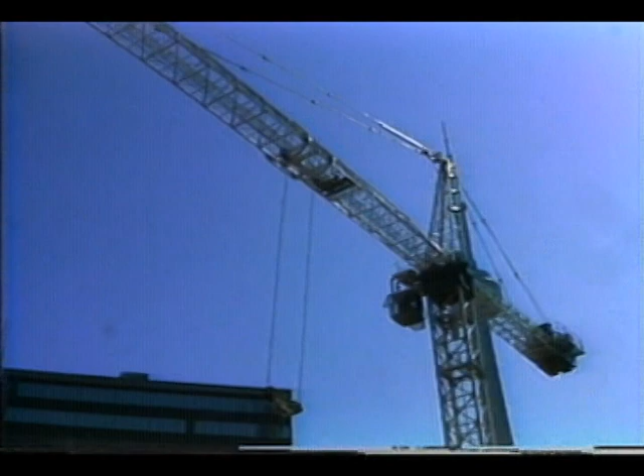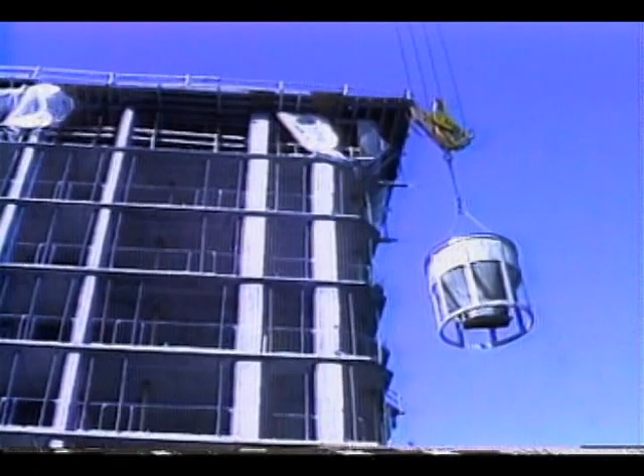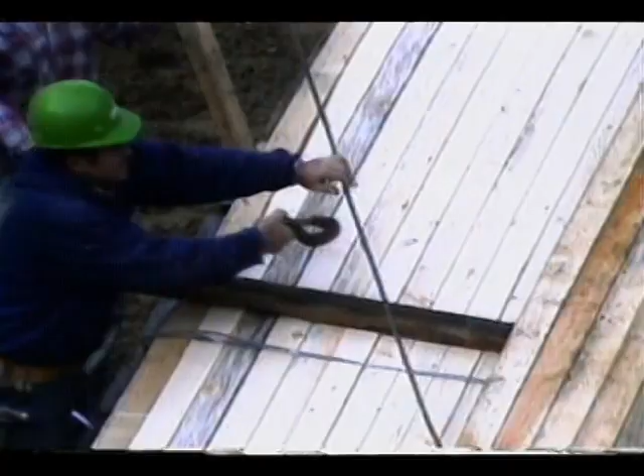There are many factors to be considered in the choice and use of wire rope for rigging and hoisting. One of the most important is safety. Although you must select equipment that will get the job done economically, you must also eliminate any hazard to people and property. Use only wire ropes of the size, grade, and construction specified by the manufacturers of hoisting equipment or wire rope. They base their recommendations on actual working conditions.

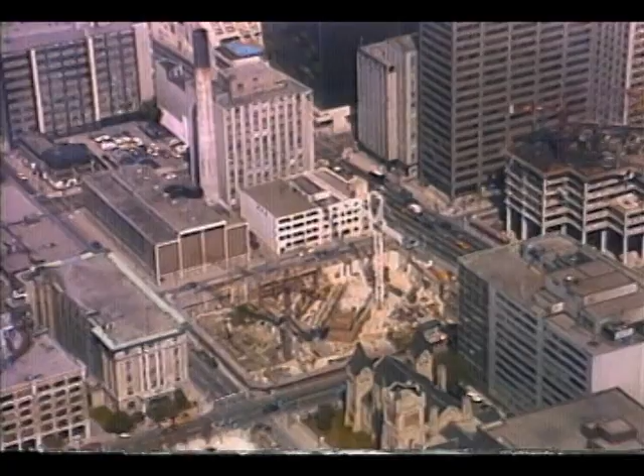In this session, you will learn how to identify, select, and safely use the wire ropes required for rigging and hoisting in construction. The topics we will cover are wire rope construction and characteristics, safe working load, inspection, replacement criteria, and use, handling, and maintenance.

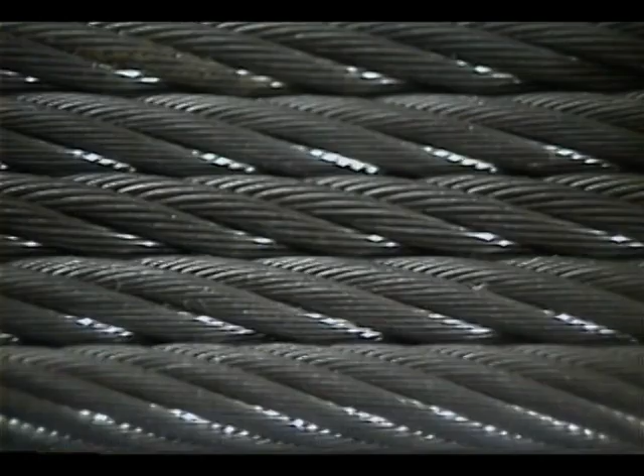Wire rope is usually made up of a number of wires laid into a strand and a number of strands laid around a core. The core may be an independent wire rope or a fiber rope. The term rope lay signifies the direction of rotation of the wires and the strands in the rope. Rotation is either to the right, clockwise, or to the left, counterclockwise. The lay of the rope affects its flexibility and resistance to wear.

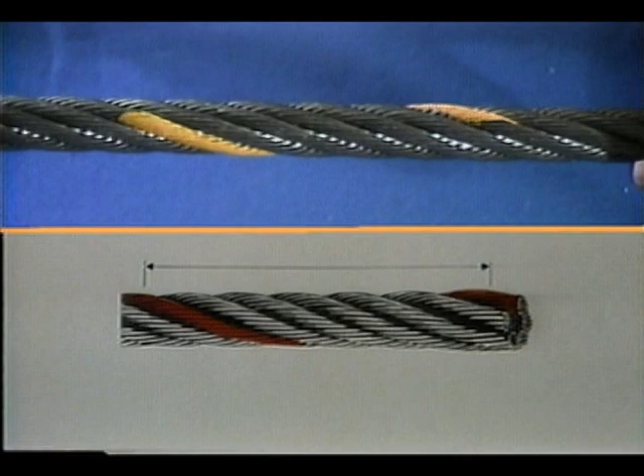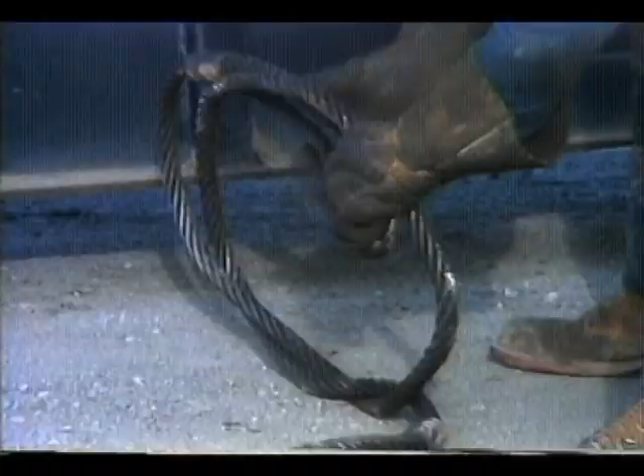The term lay length means the distance in which a strand makes one complete revolution around the rope axis. Lay length is 6 to 7 rope diameters for most wire ropes. In regular lay ropes, the wires in the strands are laid in one direction, while the strands in the rope are laid in the opposite direction. These ropes have good resistance to kinking and twisting. They can also withstand considerable crushing and distortion because only short lengths of wire are exposed on the outer surface.

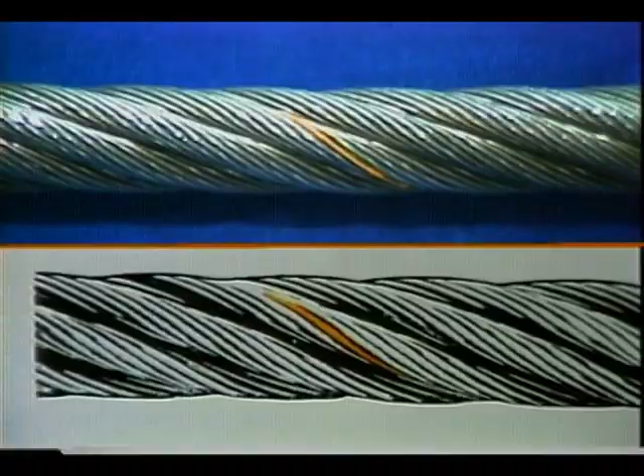In Lang lay ropes, the wires in the strands and the strands in the rope are laid in the same direction. The outer wires have a greater exposed area than regular lay rope and are therefore more resistant to abrasion. They are also more flexible and have greater resistance to fatigue. However, Lang lay ropes are more susceptible to distortion, crushing, kinking, and untwisting than are regular lay ropes. For this reason, both ends should be fixed so that rotation is prevented. They should not be used on single-part hoist lines or with swivel end connectors.

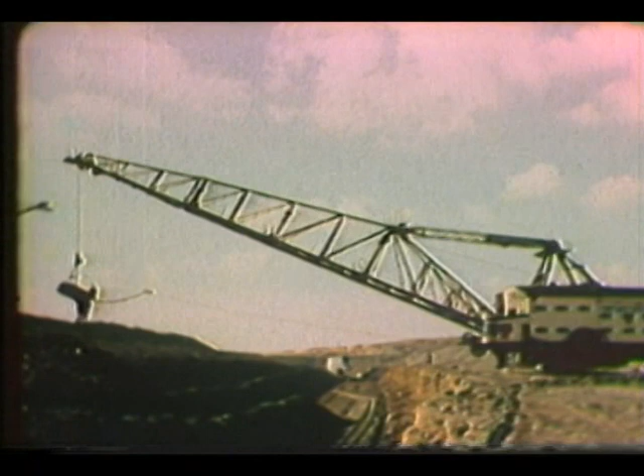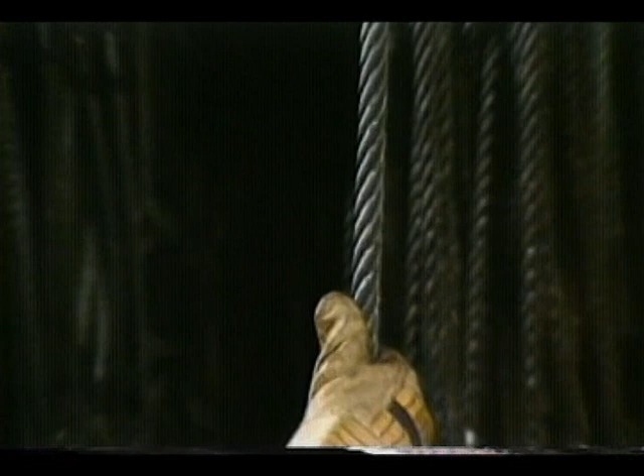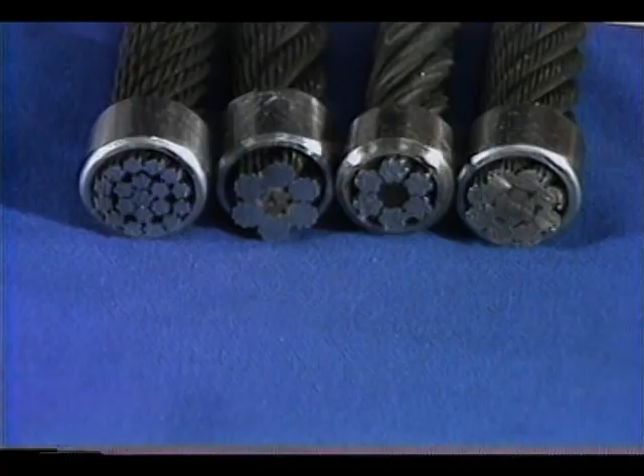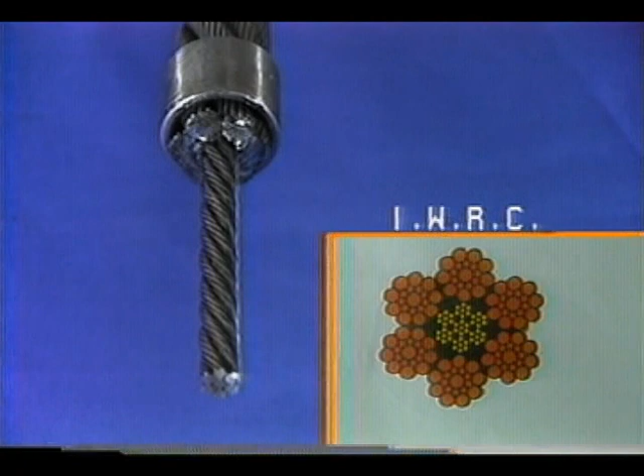Most wire ropes used in construction are right regular lay. This means that the strands twist to the right, while the wires twist to the left. The core forms the heart of the rope and is the component around which the main rope strands are laid. The core supports the strands and is intended to keep them from jamming against each other under normal loads and flexings. Wire rope is generally independent wire rope core, IWRC, or fiber core, FC. The fiber may be synthetic or natural.

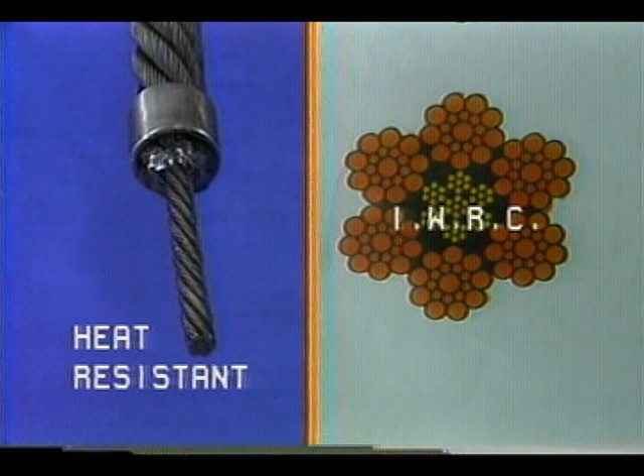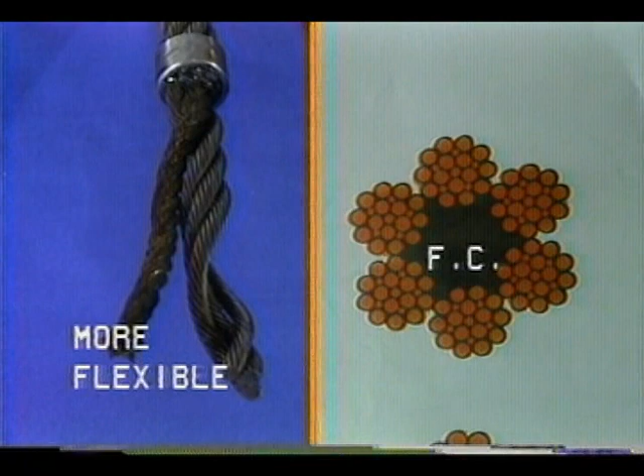Rope with independent wire rope core is more crush resistant than fiber core rope. It is also, to a certain degree, heat resistant and is slightly stronger than fiber core rope of the same diameter and construction. Wire rope core would be used, for example, where there are multiple layers of wire rope on a take-up drum or winch. Fiber core rope is more flexible than wire core rope of the same diameter and is also less costly. The type and size of wire used, the number of wires in the strands, the type of core along with its diameter determine the strength of a wire rope.

A typical wire rope designation would be half-inch diameter, 6 by 19 Seale, preformed, improved plow steel, IWRC, right regular lay. The half-inch diameter is a nominal diameter. Most new wire ropes are oversized by up to 5%. Measure wire ropes from crown to crown on opposite strands to get the correct diameter.

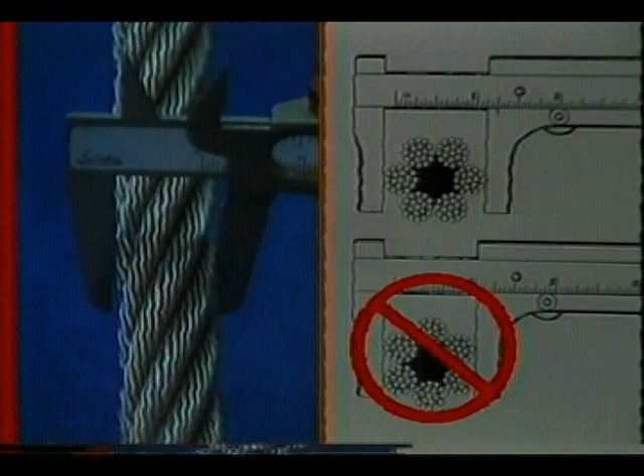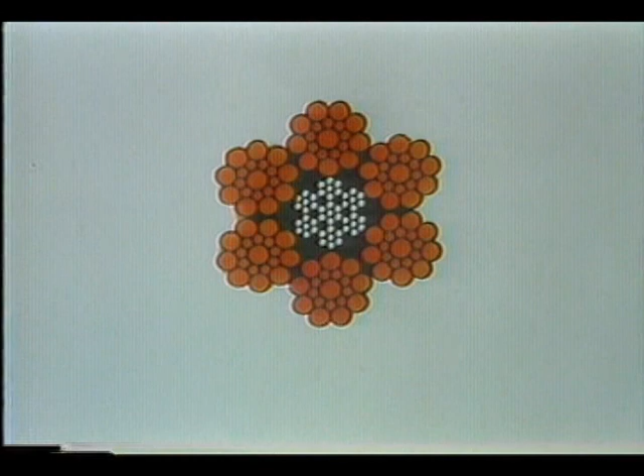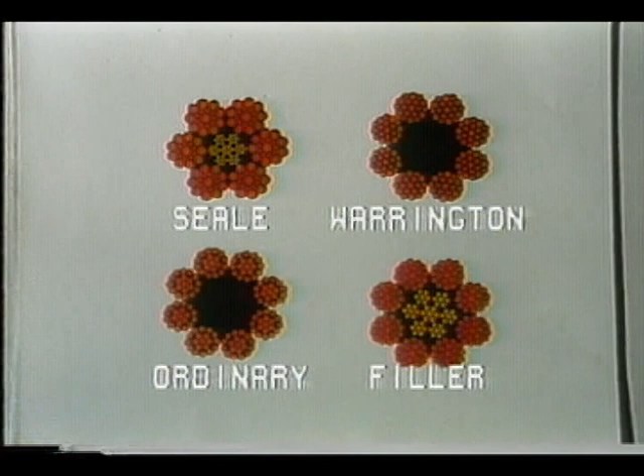6 by 19 Seale. The first number is the number of strands in the rope, in this case 6. The second number is the number of wires in each strand, 19 in this case. The word Seale indicates the pattern of wires in the strands. Other common configurations are Warrington, ordinary, and filler.

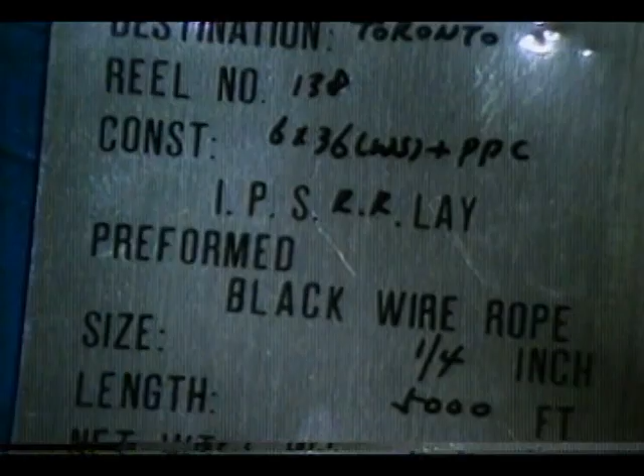Preformed refers to a process that forms the strands and wires into the spiral shape they will assume in the rope. Preforming prevents the wires and strands from straightening and brooming out after the rope has been cut. Improved plow steel, or IPS, is now the most common grade of steel used in wire ropes, although extra improved plow steel is becoming more popular.

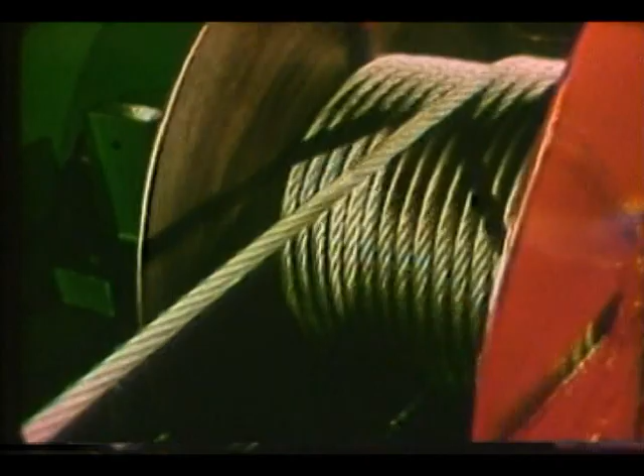IWRC stands for Independent Wire Rope Core. FC or fiber cores are also used. Right regular lay indicates that the wires in the strands twist to the left, while the strands themselves twist to the right. The construction of wire rope determines many of its properties.

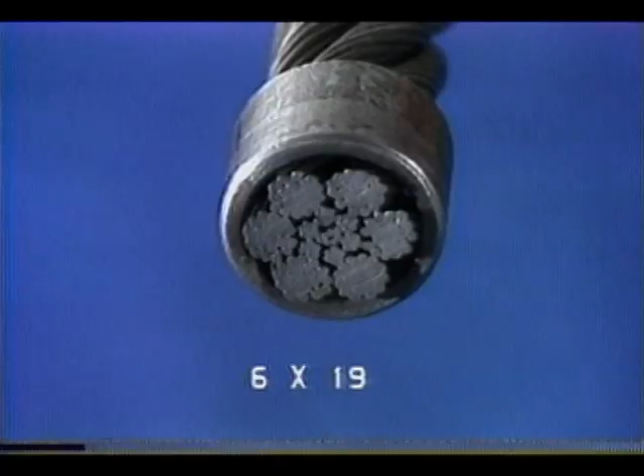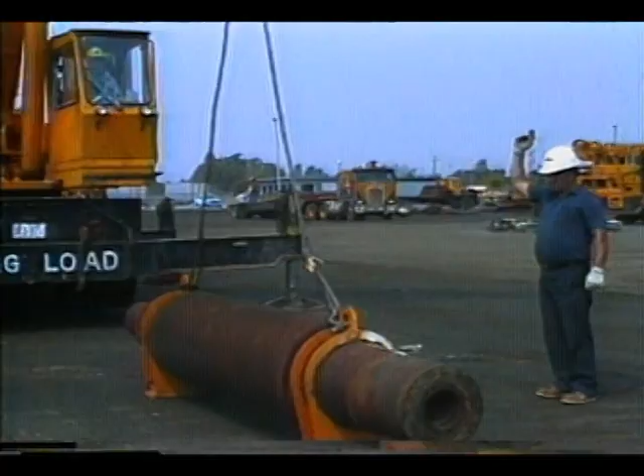The 6x37 classification includes ropes that have excellent flexibility, reasonable resistance to crushing, and are well adapted to high speed and multiple reeving applications. This classification covers ropes with 6 strands having 27 to 49 wires per strand.

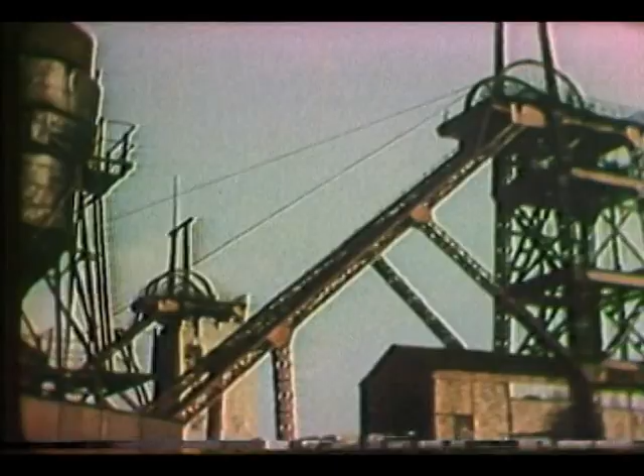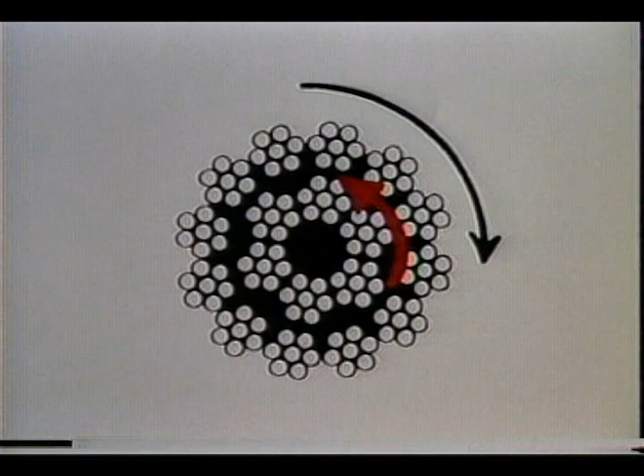In rotation-resistant ropes, the rotation-resistant characteristic is achieved by building into the rope 2 layers of strands, one having right lay and the other left lay. When loaded, the tendency of the outer layer of strands to rotate in one direction is counteracted by the tendency of the inner layer of strands to rotate in the opposite direction. Some rotation-resistant constructions incorporate 3 layers. Rotation-resistant ropes are popular for use as hoisting lines on cranes.

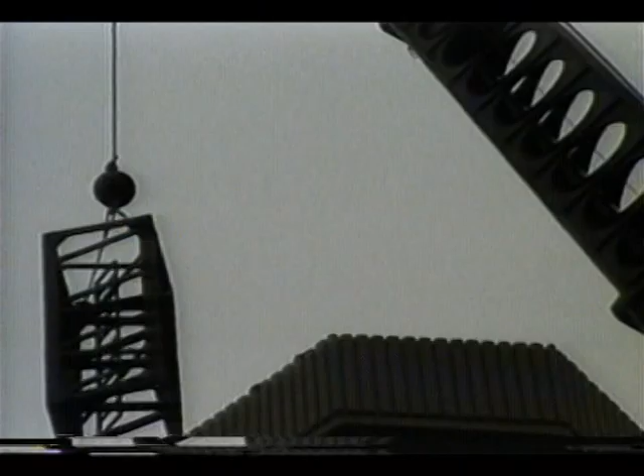Before using wire rope for any hoisting application, you must know the strength of the rope and the magnitude of the load to be applied to it. In connection with these factors, 3 abbreviations are commonly used in rigging. SWL means safe working load. This is the load which can be applied repeatedly without overloading the rope, provided the rope is in good condition. BS stands for breaking strength. That's the load at which the rope breaks when new. FS stands for factor of safety. This is the ratio of breaking strength to safe working load.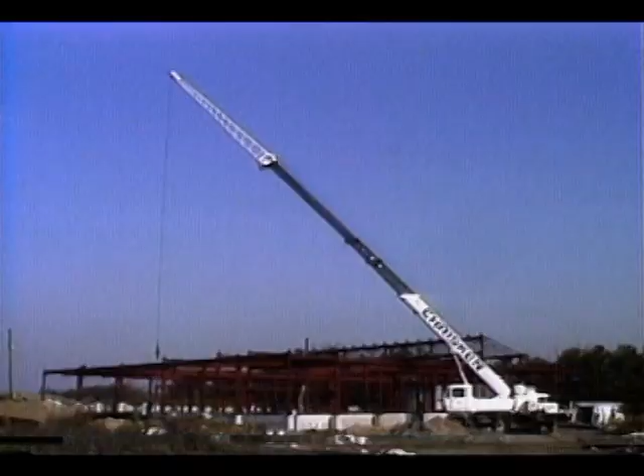3 standard formulas express the relationship between these 3 quantities. Safe working load equals breaking strength divided by factor of safety. Breaking strength equals safe working load times factor of safety. Factor of safety equals breaking strength divided by safe working load.

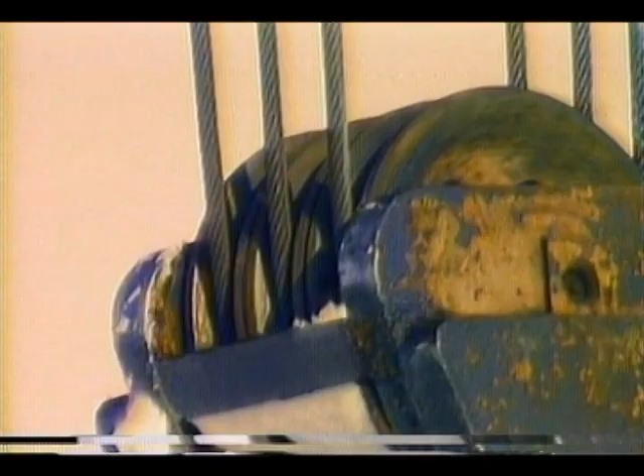The factor of safety is 3 to 1 for pendants, 3.5 to 1 for hoist lines on mobile cranes, 5 to 1 for all slings, and 5 to 1 for hoist lines on tower cranes, and 10 to 1 for wire ropes used on personnel hoists.

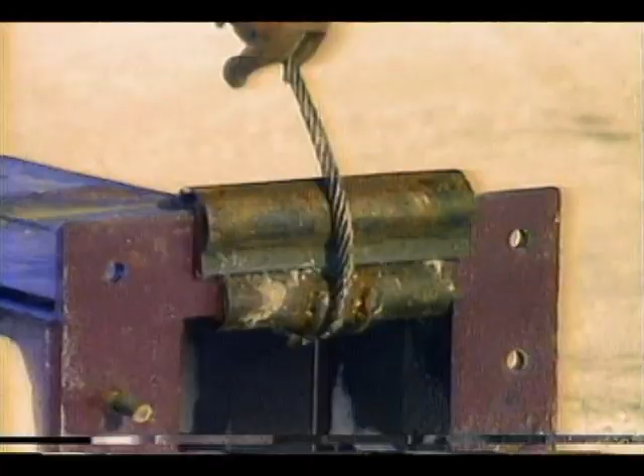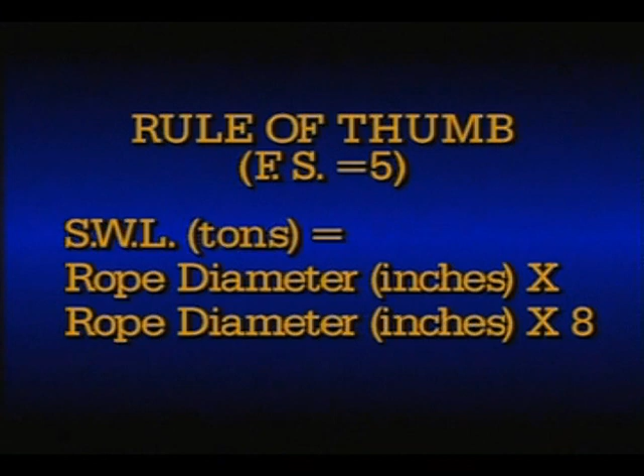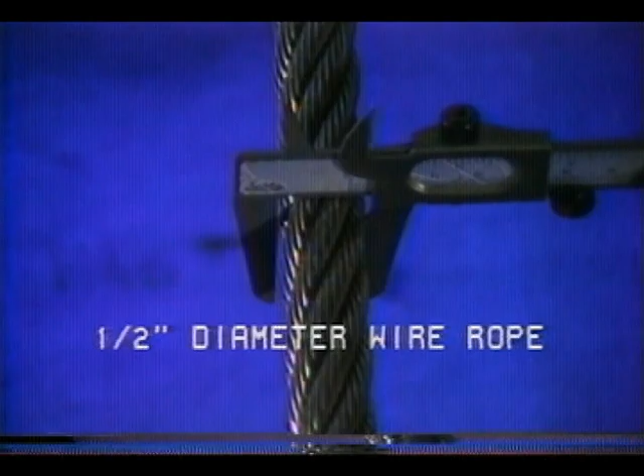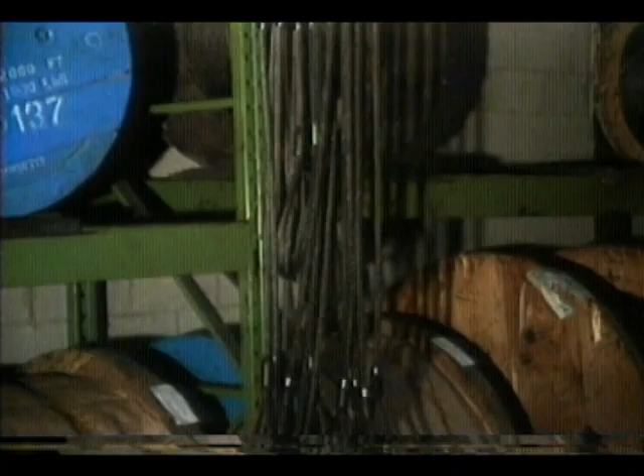If you don't know the safe working load of a wire rope, use the following rule of thumb to compute the safe working load in tons. For a factor of safety of 5, the safe working load in tons equals rope diameter in inches times itself times 8. Or in other words, safe working load in tons equals D squared times 8. For a half-inch diameter wire rope, the safe working load is 1/2 times 1/2 times 8, which equals 4/8 times 4/8 times 8, or 16/8, which equals 2 tons. This rule of thumb formula applies to new ropes made of improved plow steel.

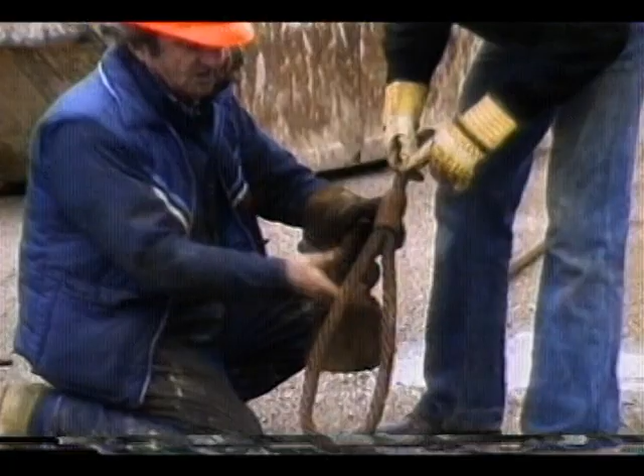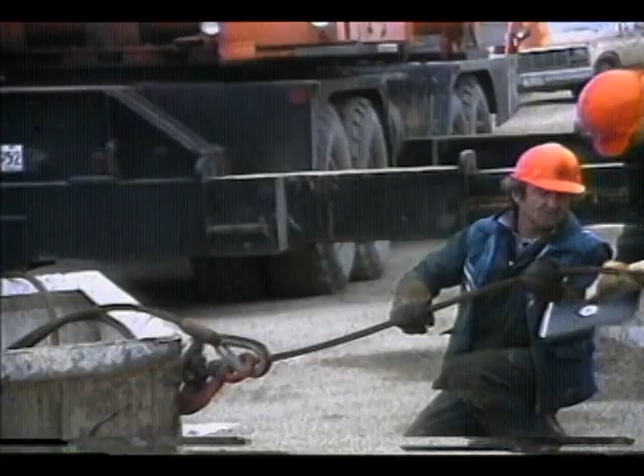The single most important operational check to be made on hoisting and rigging equipment is the rope and rigging inspection. Safety and economy dictate the need for periodic inspections of all load-supporting wire rope and fittings. Factors such as insufficient lubrication, abrasion, wear, fatigue, corrosion, improper reeving, and kinking are often more significant in determining the usable life of wire rope than strength factors based on new rope conditions.

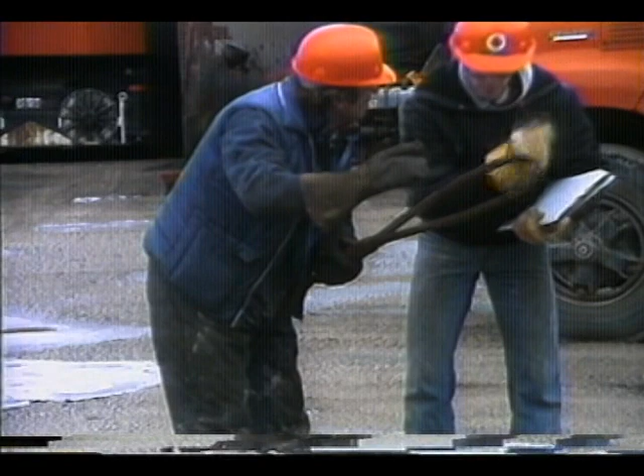All wire rope in continuous service should be monitored daily during normal operation and inspected on a weekly basis. A complete and thorough inspection of all ropes in use must be made at least once a month. All rope idle for a month or more should be thoroughly inspected before it is put back into service.

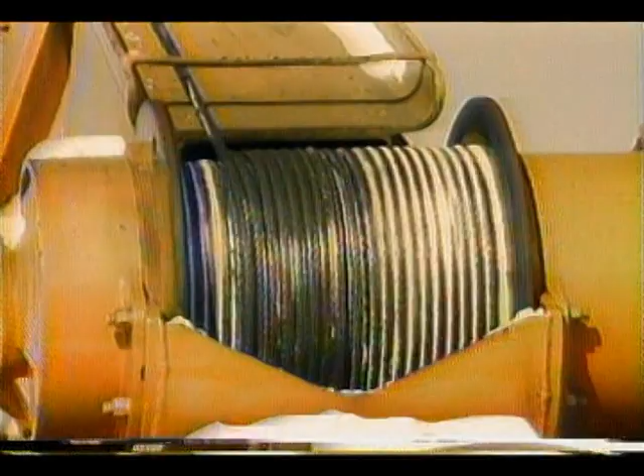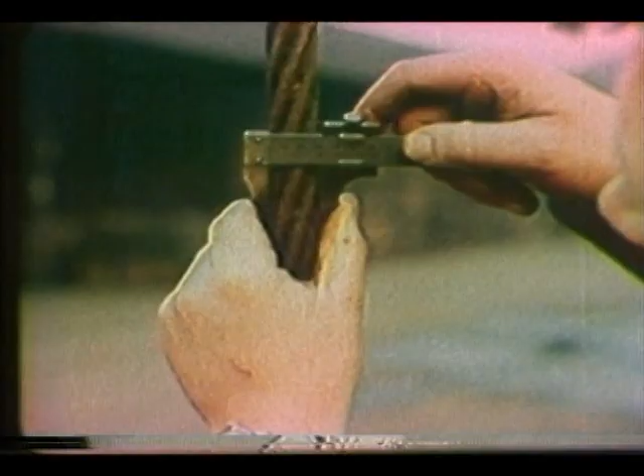Rotation-resistant wire ropes require very careful inspection. They tend to wear from the inside out because the two layers of strands rub against each other during normal use. Before any damage or wear can be seen on the outside of the rope, it can be severely damaged inside. One of the easiest ways to detect inside breaks is to hold a length of the rope up to your ear and bend it. Run the bend back and forth through the length. If you hear a crackling or a popping noise, there are likely broken wires inside the rope. Pay particular attention to areas close to end fittings.

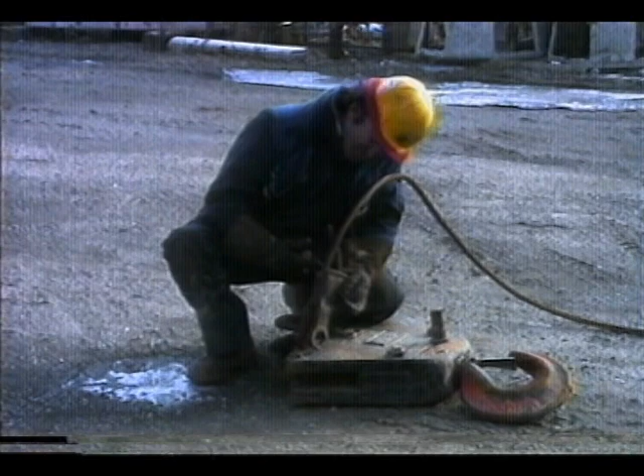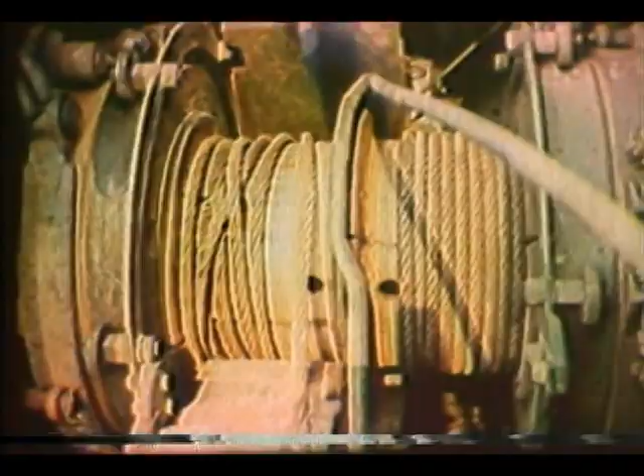Where multi-layered drums are used, examine not only the rope in constant use, but also the rope that is spooled and inoperative on the drum. Examine all ropes, including standing ropes, for possible defects caused by corrosion, abrasive dust, and erection and dismantling procedures.

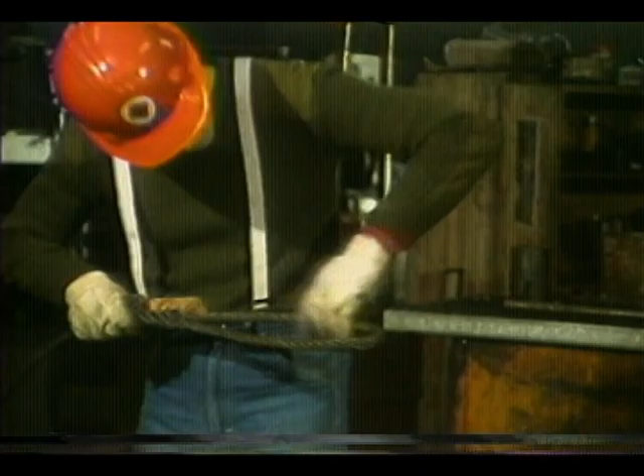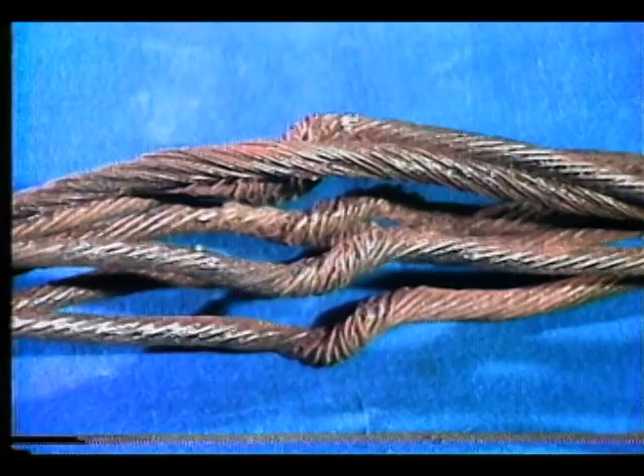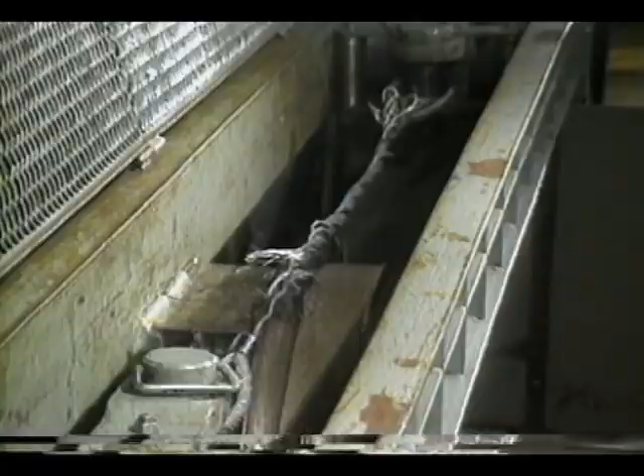Permanent damage and deformation, such as kinks, crushed, flattened, and distorted strands, and uneven wear are the conditions which make a rope extremely susceptible to failure. The weakest part of a rope determines the overall strength of the rope. The weak point may be where the rope is badly worn, where it has a number of broken wires, where the stresses are unequal in the strands, where bending the rope over a sheave creates wear and tear, or where the rope is attached to equipment or loads.

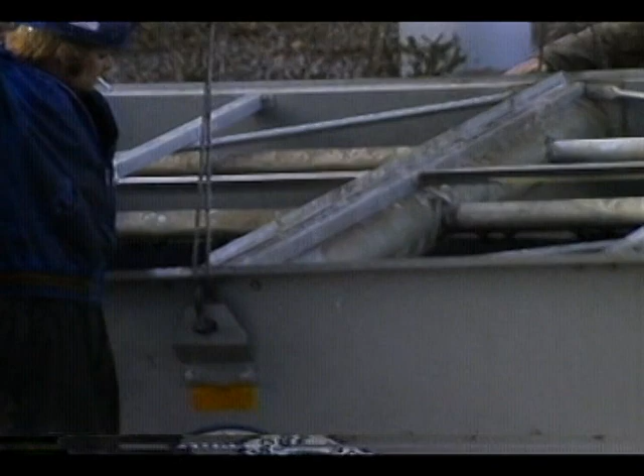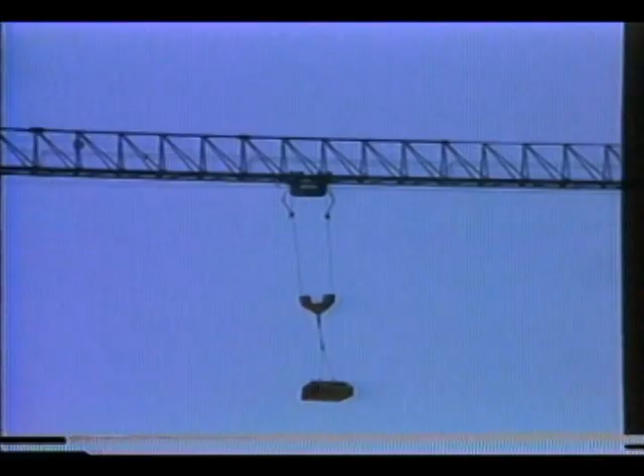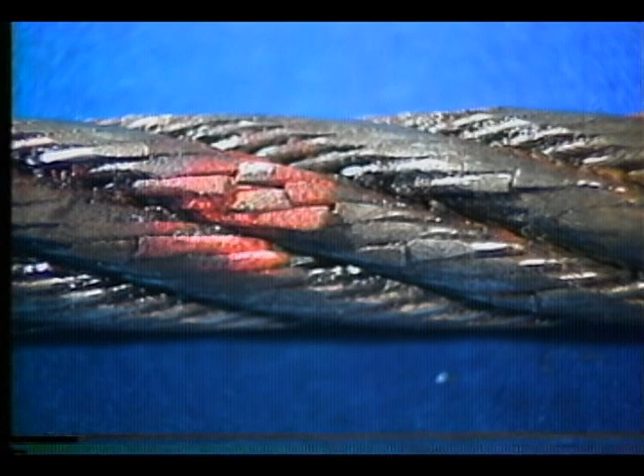Only inspection can detect potential hazards and reduce accidents. Construction regulations under the Occupational Health and Safety Act state that steel wire rope must not be used where 6 randomly distributed wires are broken in one rope lay, or 3 or more wires are broken in one strand in any rope lay, where wear exceeds 1/3 of the original diameter of outside wires, where there is kinking, bird caging, corrosion, or any other damage resulting in distortion of the rope structure, or where there is evidence of any other possible cause of rope failure, including contact with electricity.

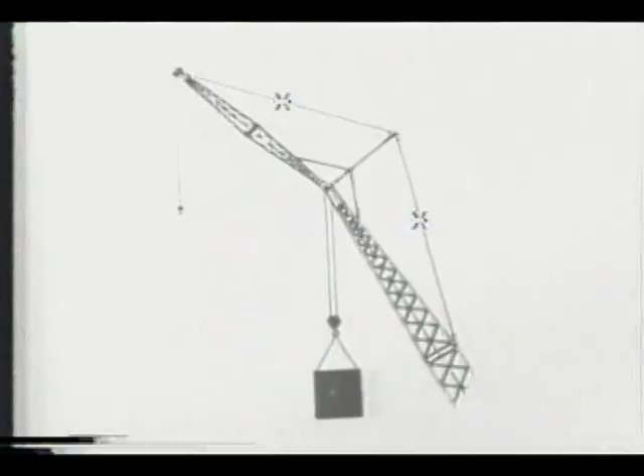The regulations go on to state the allowable reduction in diameter for various size ropes. Steel wire rope that is static or used for pendants should not be used if there are 3 or more broken wires in one lay in sections between end connectors, or if there is more than one broken wire at an end connector.

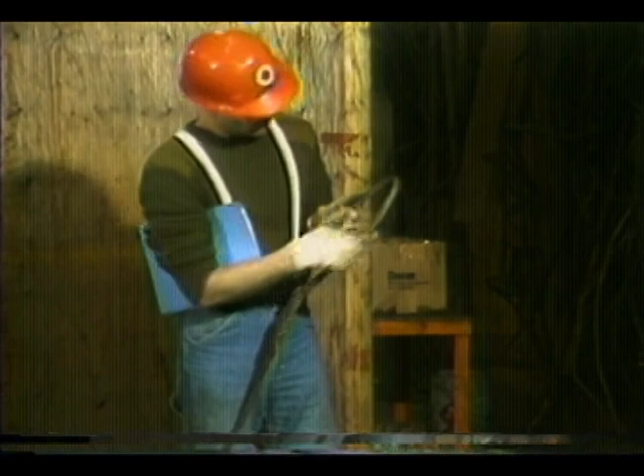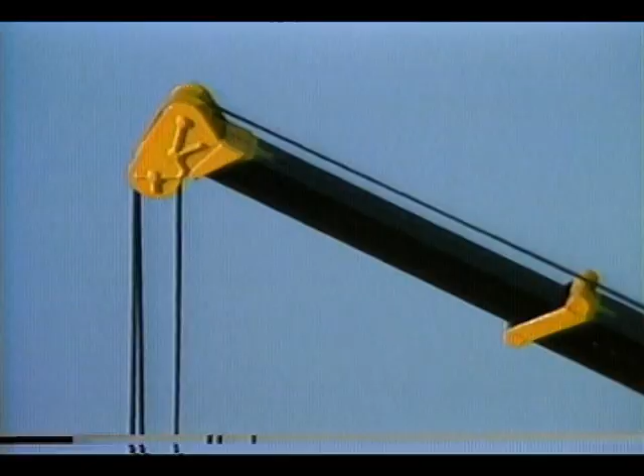Wire ropes require careful use, handling, and maintenance for long and safe performance. Ensure that the correct size, grade, and construction of rope is used. Inspect the rope regularly. Never overload. Avoid shock loading. Shock loads will increase the load in the rope dramatically. Broken wire ends should be removed as soon as possible by bending the broken ends backwards and forwards with a pair of pliers. This way, the wire is more likely to break inside the rope where the end can do no harm.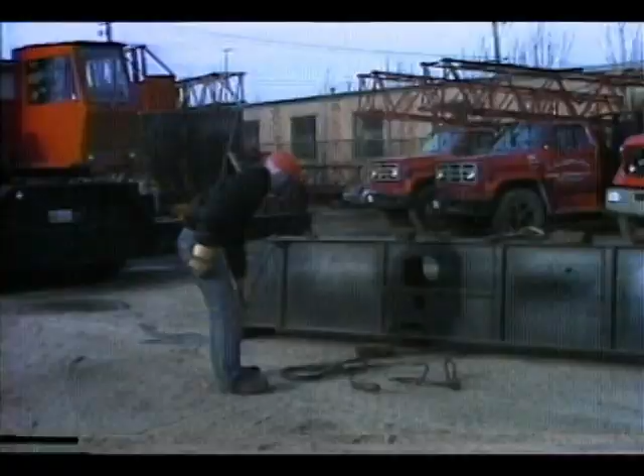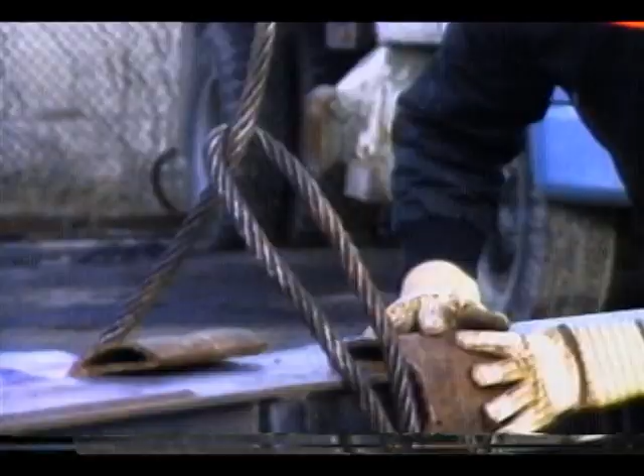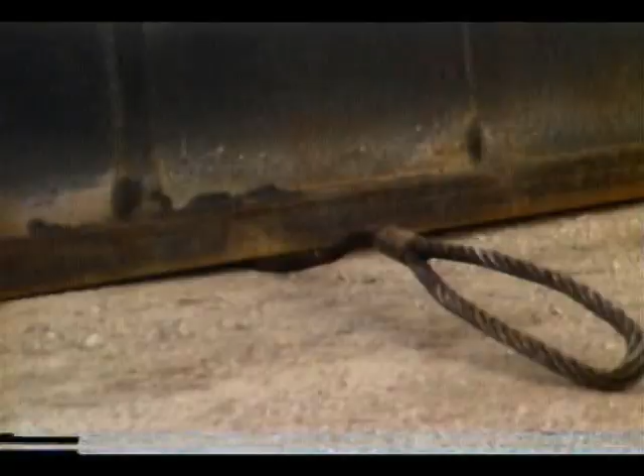Take special precautions and/or use a larger size rope and appropriate hardware whenever the exact load distribution is not known, there is a possibility of shock loading, or there is a hazard to personnel. Use padding or softeners to protect rope from sharp corners or edges. Never drag the rope from under loads or over obstacles. Always use blocking under the load. Avoid dropping the rope from heights. Never roll loads with ropes. Store all unused rope in a clean, dry place, preferably off the ground. Never use rope which has been cut, badly kinked, crushed, or otherwise misused.

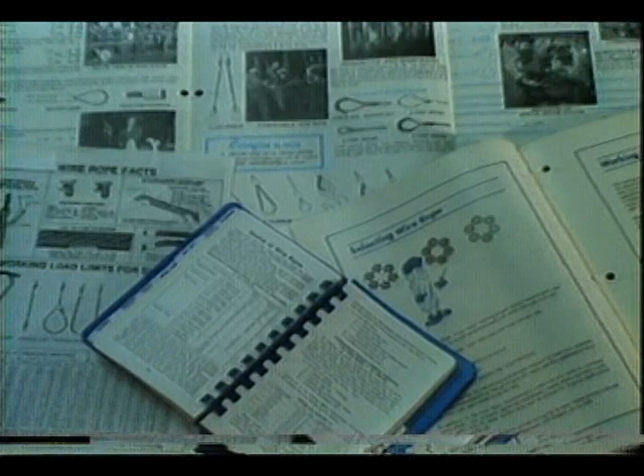Lubrication is the prime factor in extending the working life of wire rope. Lubrication not only reduces friction between individual wires in a rope, it can also prevent internal rusting. Most wire rope is lubricated before it leaves the manufacturer. But even well-lubricated wire rope should not be unduly exposed to the elements. Wire rope exposed for long periods of time should be checked frequently for damage, corrosion, and possible breakdown of lubricant. Wire rope should be cleaned and lubricated regularly, according to the rope manufacturer's recommendations.

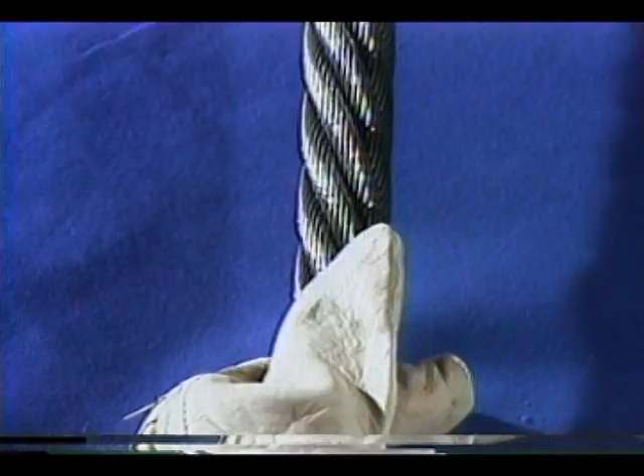Remember that in regular lay ropes, the strands and the wires are laid in opposite directions. Lang lay ropes have the wires and the strands laid in the same direction. Rotation-resistant ropes have 2 or 3 layers of strands laid in opposite directions to each other. Strands containing a large number of small wires are more flexible and resistant to bending fatigue than strands containing a few large wires. On the other hand, large outer wires are better able to withstand abrasion.

The factor of safety used in calculating safe working load is 3 for pendants, 3.5 for hoist lines on mobile cranes, 5 for hoist lines on tower cranes and all slings, and 10 for personnel hoists. For a safety factor of 5, the safe working load of a wire rope can be calculated by multiplying the square of the diameter in inches by 8.

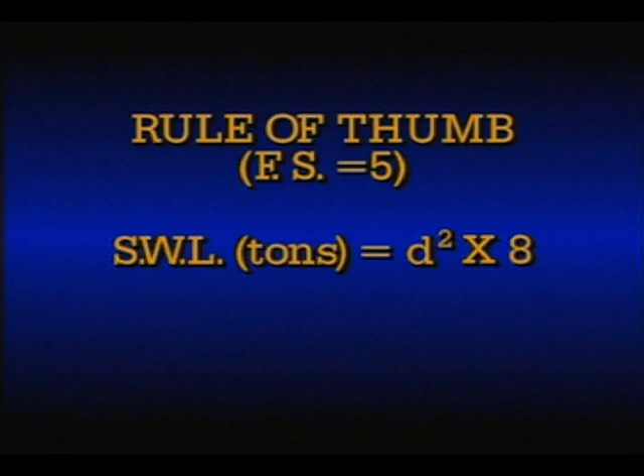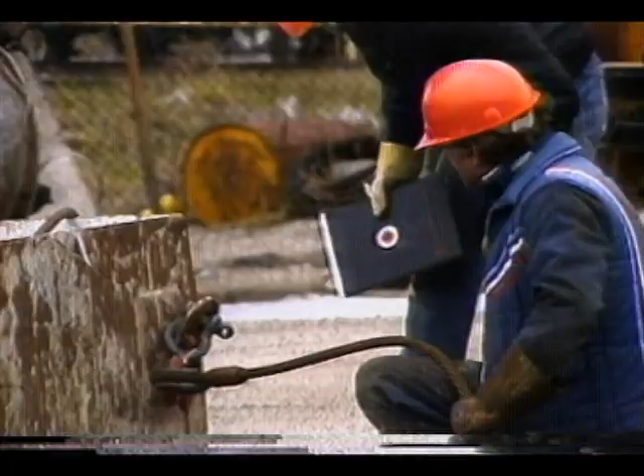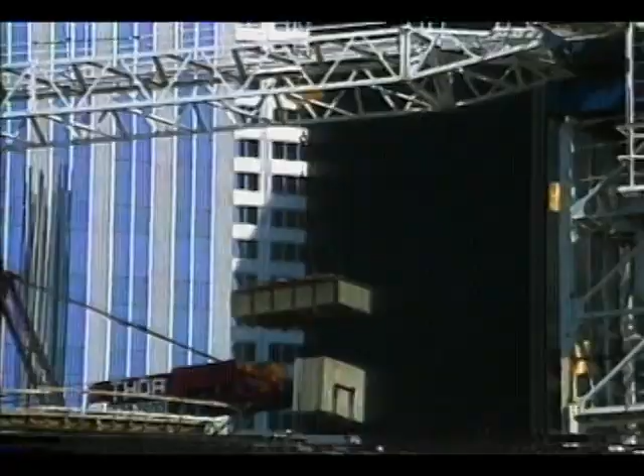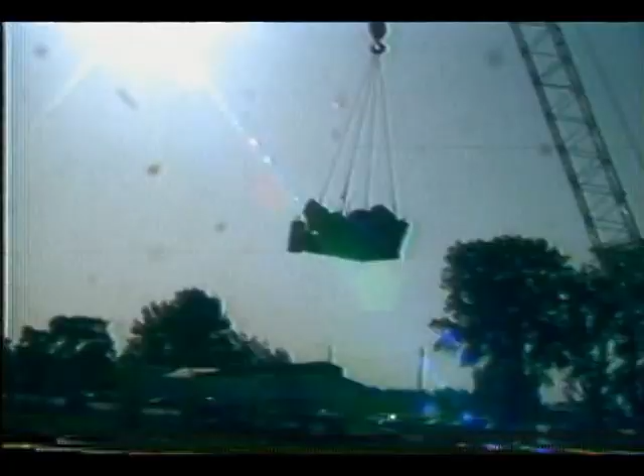Ropes should be inspected regularly, especially the sections subjected to bending, abrasion, and vibration. The rope should be taken out of service if there is any doubt about its reliability. Proper use and maintenance will ensure that wire ropes retain strength throughout their working life. You should now know how to identify various wire ropes by construction, rated loads, and application. You should know how to calculate safe working loads and how to properly handle, maintain, and apply wire ropes to typical construction purposes.